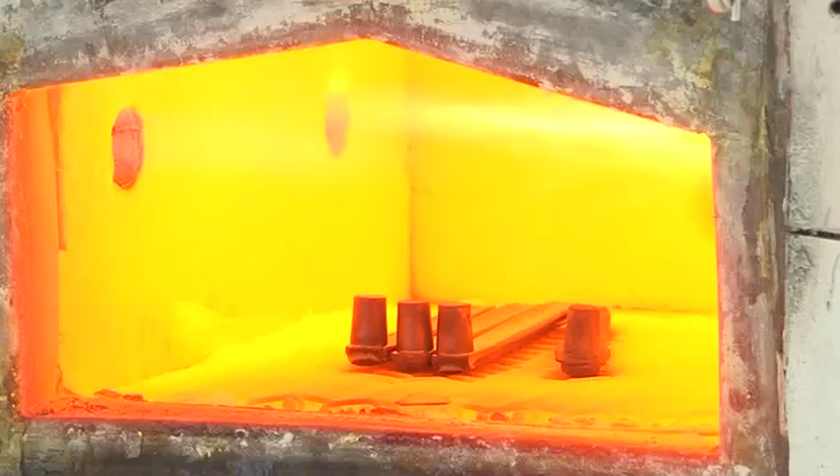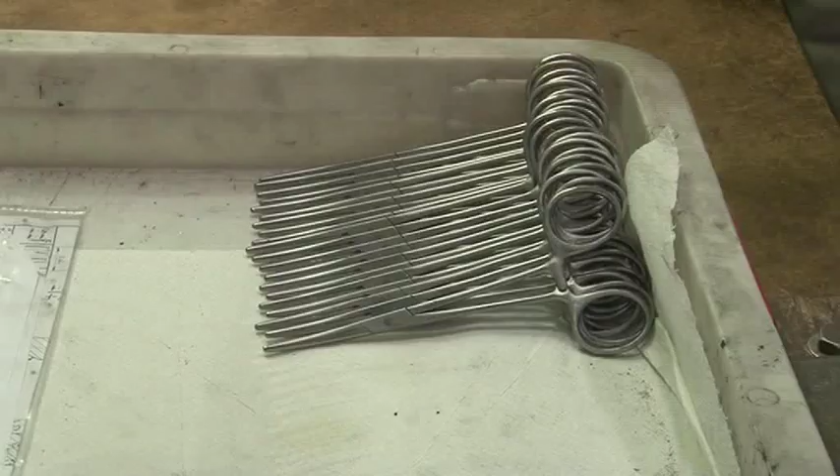Instrumentaria, a company with a long tradition and a huge catalogue of equipment for the medical profession, and the complete range of manufacturing processes on one site. Instrumentaria's production capability ranges from forging to finishing, including quality control and packaging. The company's catalogue lists 5,000 items, from hip prostheses to plates, nails and screws, tools for surgeons, dentists and vets, and laboratory equipment.

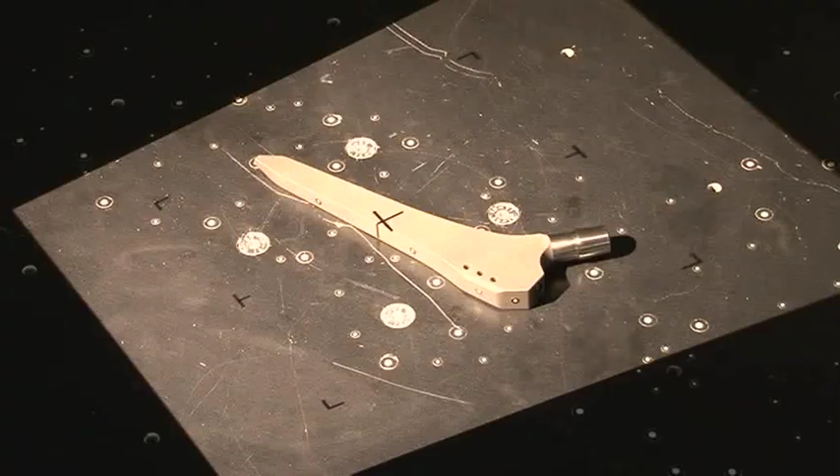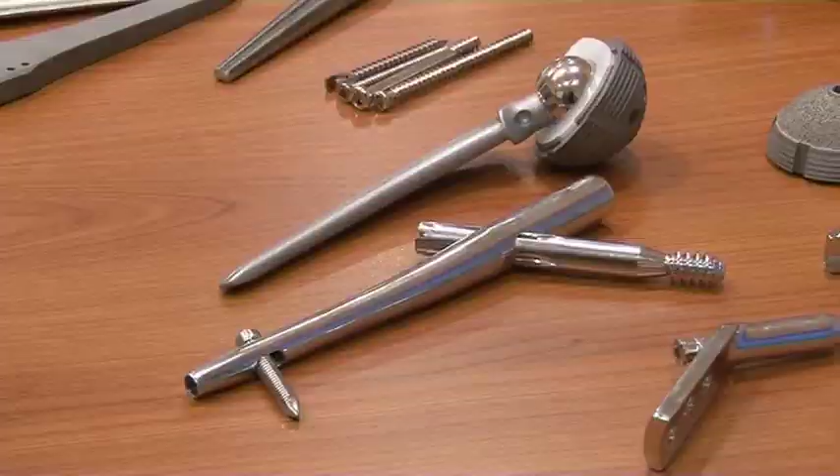Instruments and devices conform to European and international standards. The company's research draws on its own design team, as well as university, hospital and computer specialists. Our values are based on tradition, expertise and innovation. I am CEO of Instrumentaria and my name is Vladimir Kovačević.

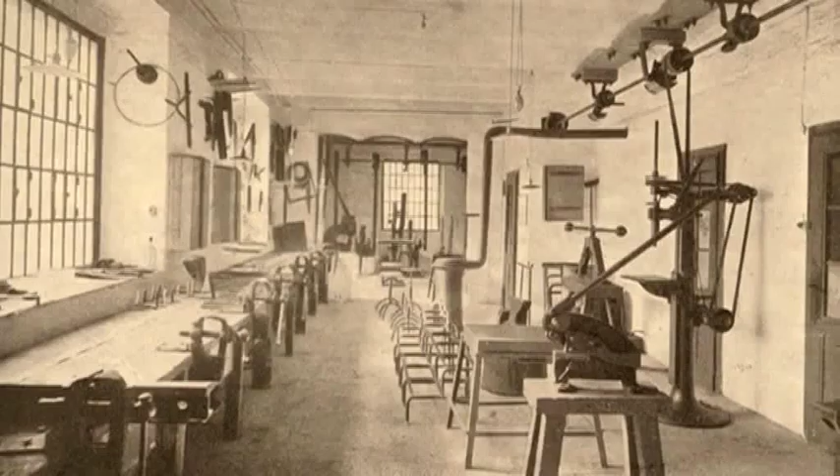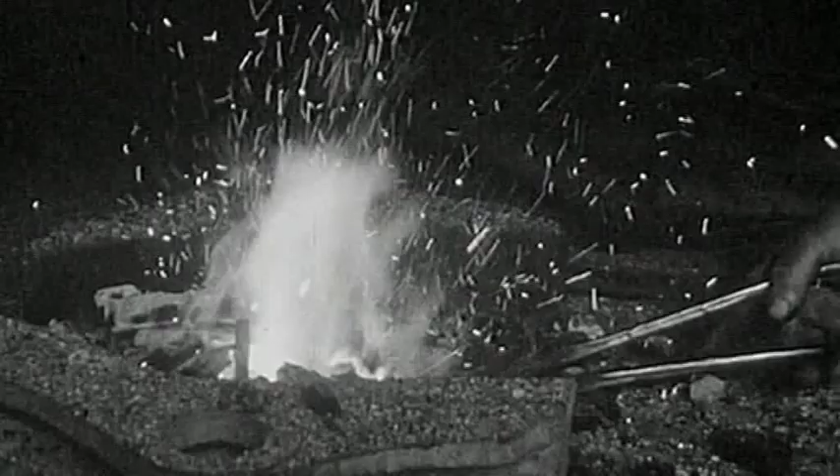The company was the inspiration of 19th century innovator Jakub Hlavka. His Zagreb factory manufactured and repaired hospital equipment, especially orthopedic implants. The business expanded throughout the 20th century, taking the name Instrumentaria after the First World War and moving to a new site after the Second. The 70s brought increasing automation and expanding exports.

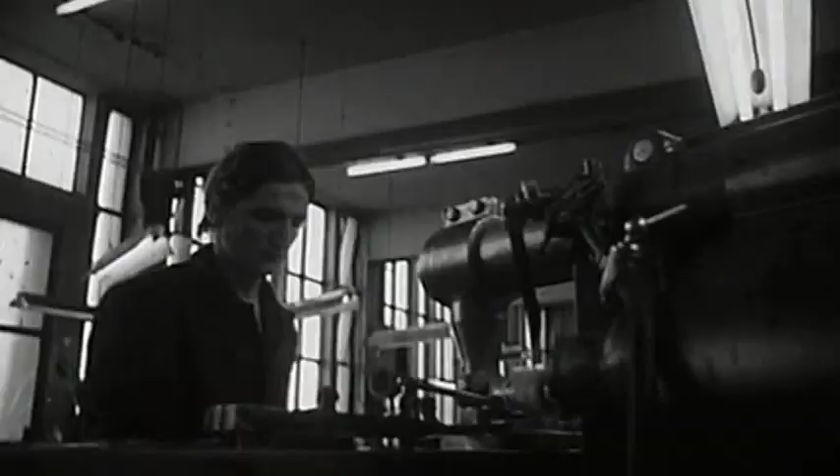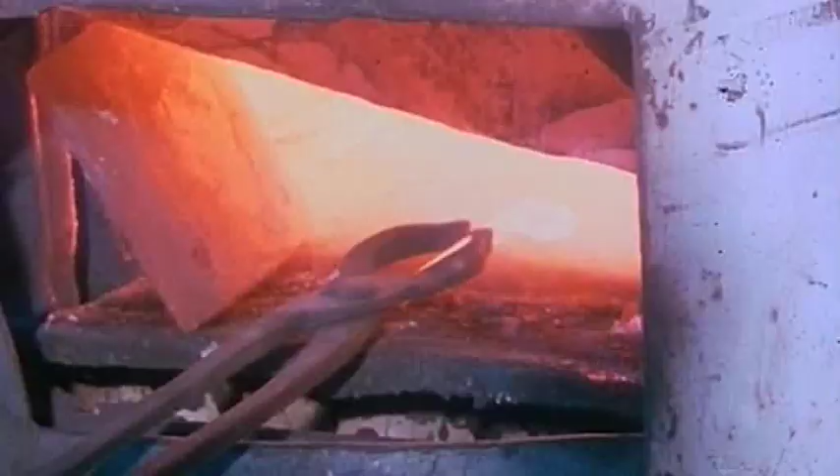Except for a period in the 80s, production continued uninterrupted, even during the Yugoslav war in the 90s, when the factory worked 24 hours a day and through the blackout. It remains the only such business in Croatia. The company is based in the capital, Zagreb. The city has been an important centre for centuries, and today, as a manufacturing and trading hub, it's at the heart of modern Europe.

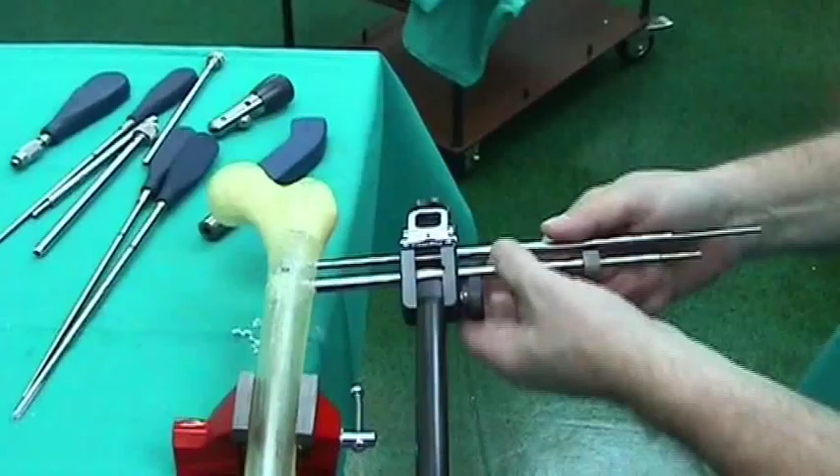Instrumentaria never stands still. Research and development are key parts of the company's operations. Its research team is driven by the need to solve medical and surgical problems. Our mission is to satisfy doctors and patients with standard and custom-made products of the highest quality. Doctors are part of our development team, and they help us adapt and modify products and even help us design new ones.

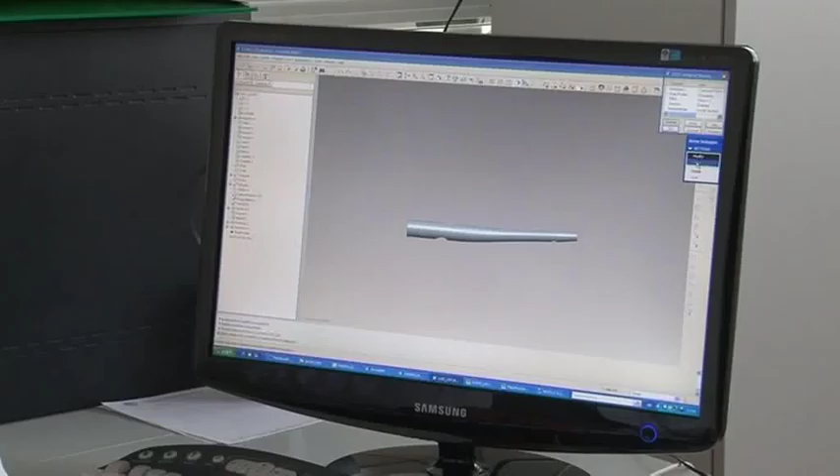I'm Martin Trummer. I'm a neurosurgeon working in Graz, Austria at the University Hospital. Neurosurgeons like me are always looking for reliable and economic solutions. Therefore, it's very useful to work closely with the manufacturers so that we can develop new approaches to meet the patient's needs. The company's R&D department uses the latest computer-aided technology to turn designs into reality. And then they call on the expertise of the production department.

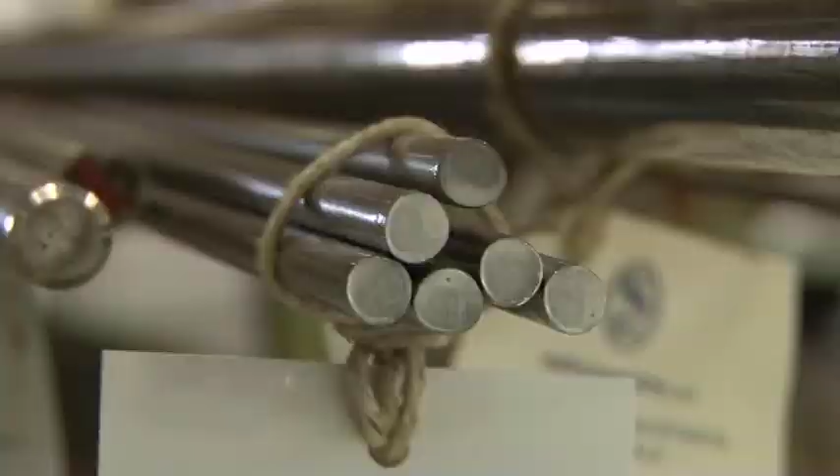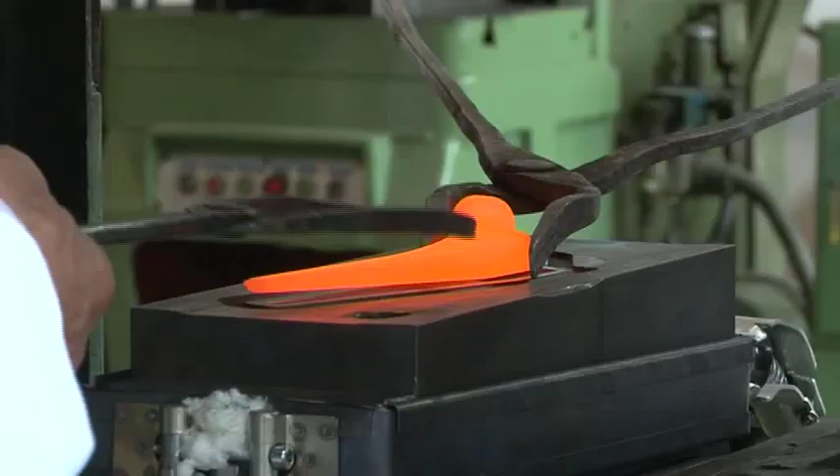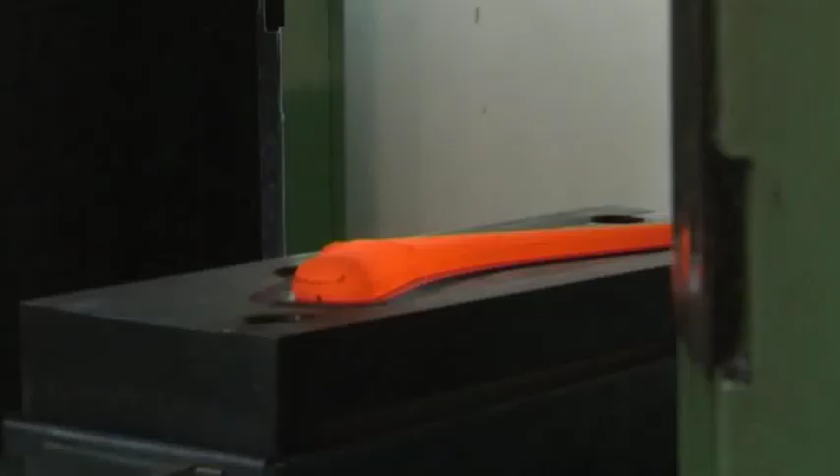Instrumentaria works with corrosion-resistant stainless steel of surgical quality, as well as commercially pure titanium and titanium alloy. Here, metal bars, first cut, turned and bent, are heated, then pressed in the first stages of creating a hip implant. I'm Štefica Švec and I'm Technical Director. Instrumentaria is one of very few companies in Europe which forge their own instruments and implants. A patented sensor prevents the machine working unless the metal is at the correct temperature.

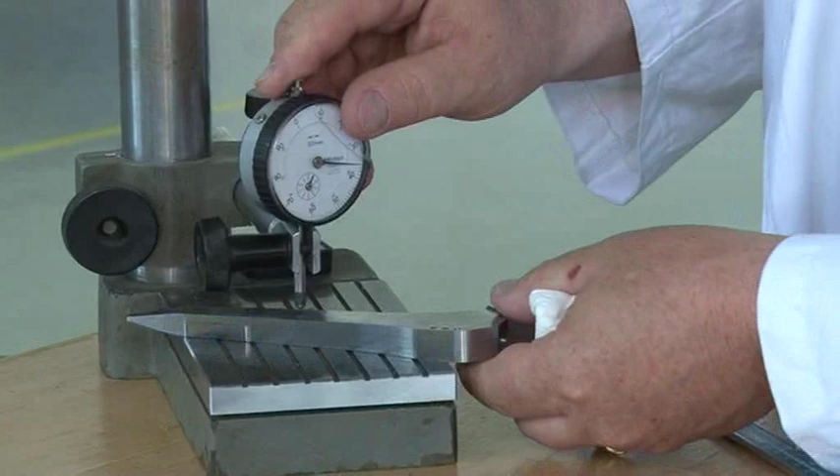This is where the stem of a hip prosthesis, made of titanium aluminium alloy, is milled and turned. The tapered edge must fit snugly into the head of the replacement hip, and the measurements are critical. I'm Aleksandar Pejković, manager in charge of quality control and regulation. The surgeon can be reassured that he will get exactly what he will need.

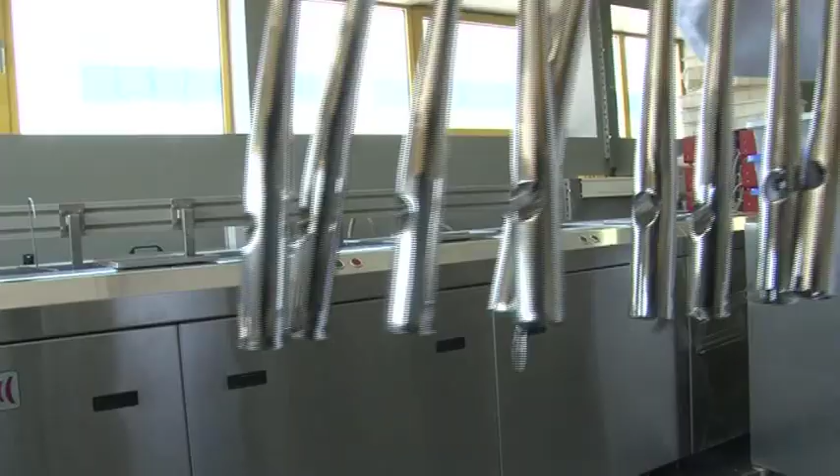Ultrasonic baths remove all grease from the finished instruments, such as these proximal femoral nails. The temperature and conductivity of the baths are constantly monitored. After drying, products, like the nails, are subjected to electro-polishing with temperature and acidity controlled and maintained.

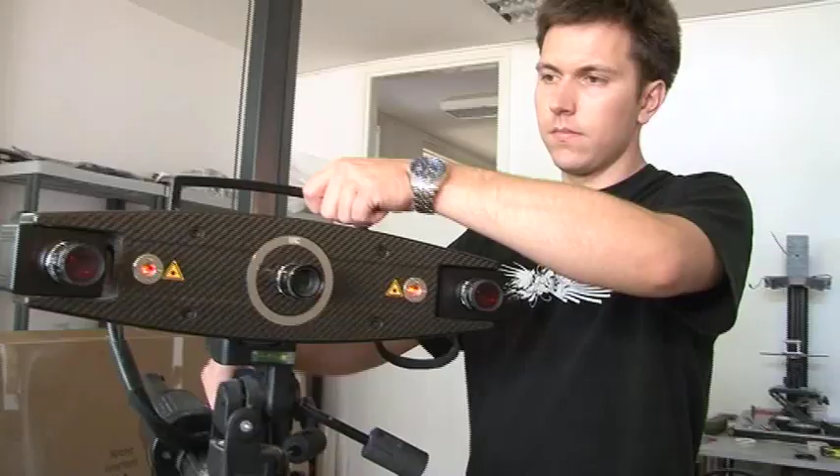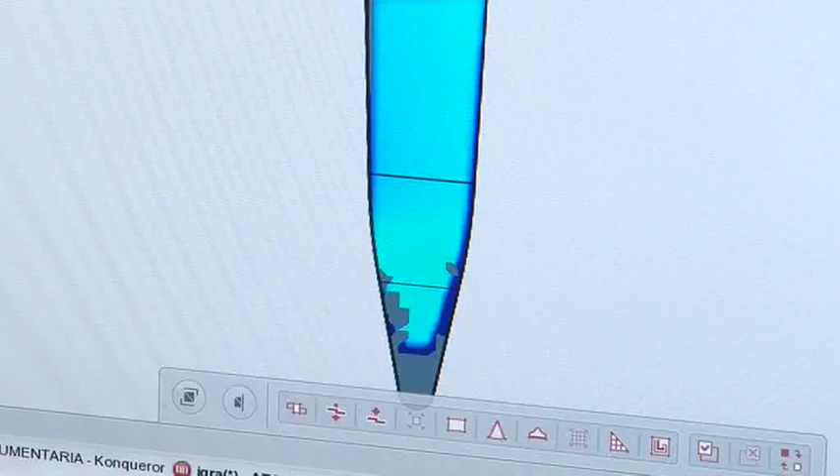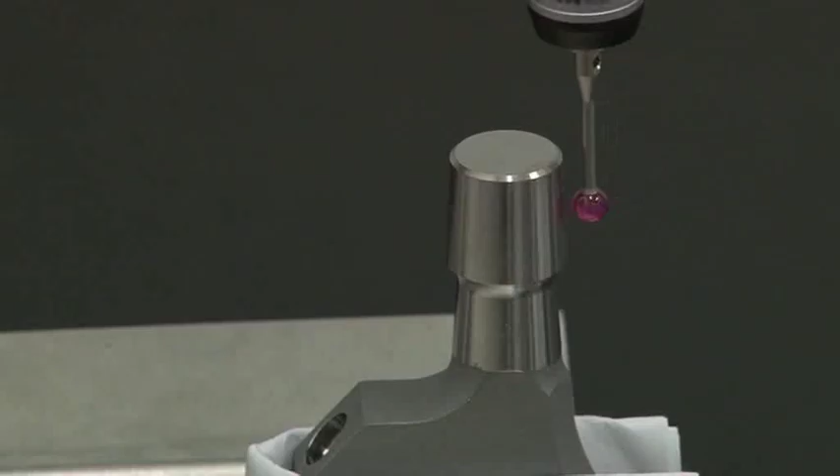Each implant manufactured by Instrumentaria, like the stem of this hip implant, is subjected to quality control and inspection using 3D scanner technology. White light scanners view the product from all angles so that it can be compared with the specification and checked that it meets the original design. And where the interrelation of two surfaces is critical, like the stem and head of a hip implant, the degree of taper is checked with state-of-the-art machinery and software.

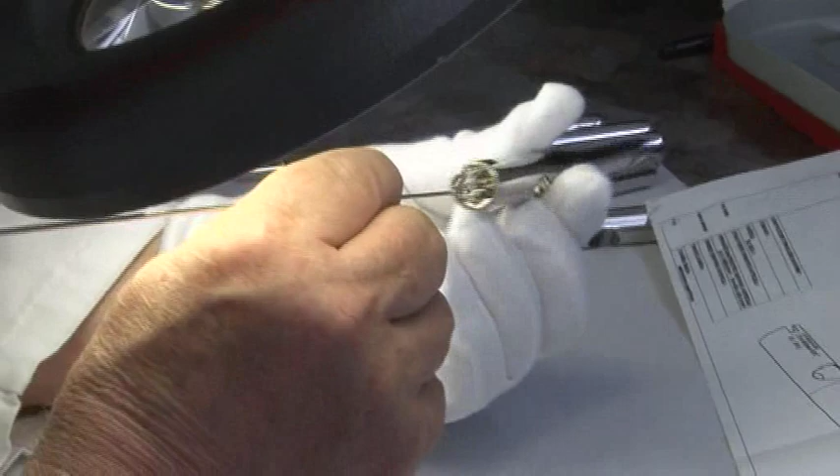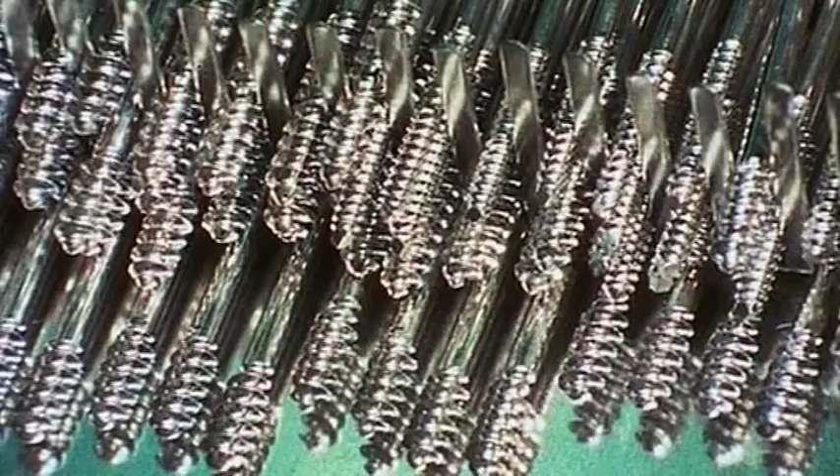Instrumentaria is a distributor for major medical suppliers. Its own products are used in hospitals and clinics across Europe. Instrumentaria not only manufactures under its own name, but other companies' products under license. Extending its range of partnerships is a logical next step.

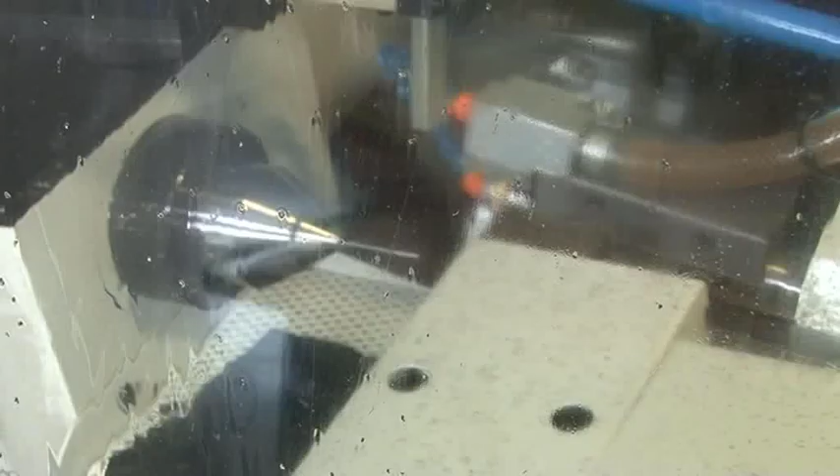We offer exactly the same quality, speedy and flexible response times, and secure delivery and competitive pricing. That makes us very attractive to potential partners. Instrumentaria, a forward-thinking business which could be part of your future.